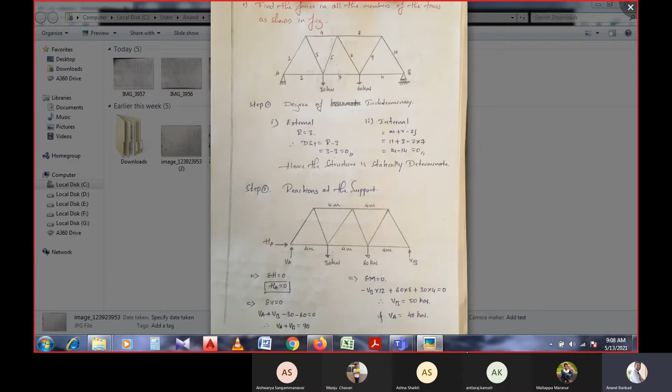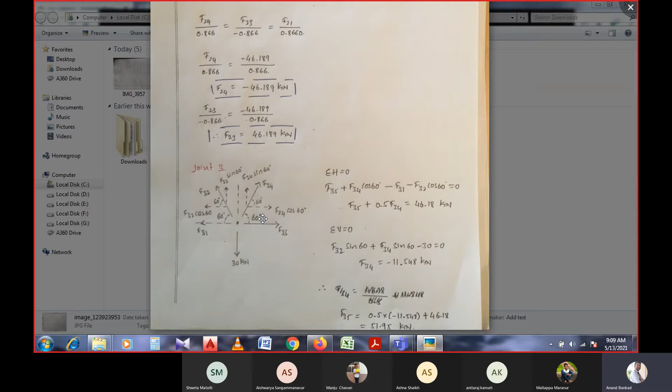We have discussed till joint number 3 in the previous class for the first problem, and let's move to joint number 4. In joint number 4, it is observed—I will show the question once again. See, this is the problem.

In this problem, joint numbers 1, 2 and 3 have been solved, and now joint number 4 is to be solved. For joint number 4, we have 4 members. In these 4 members, this beam is already defined in joint number 2, and this beam is already defined in joint number 3. So now we are left with this beam as well as this beam in joint number 4.

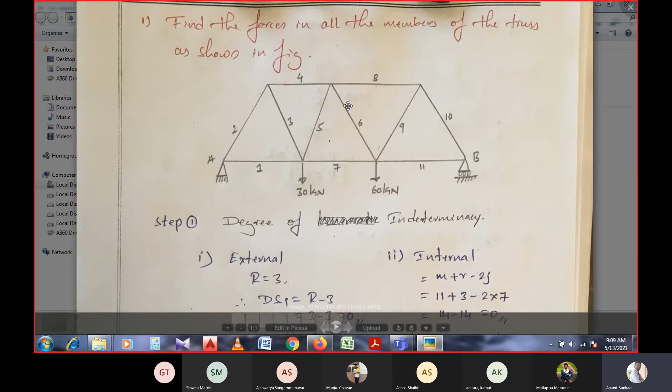So the forces in these two members have to be defined now. For that, the particular joint is drawn in this manner. Here, this member is joining to joint number 2, that is F42, and this beam is joining to joint number 6, that is F46.

Since it is the fourth joint, F42 refers to the fourth joint joining to joint number 2, and the fourth joint joining to joint number 6. So now it is going to joint number 3 and joint number 5. I hope whatever we discussed about joints is known to you from the previous class.

Since joint F42 was defined while calculating joint number 2, we got the value of minus 46.189 kilonewtons in this member. And F43 was already defined while calculating joint number 3, that is minus 11.54 kilonewtons. Now we need to define or calculate the force in members F46 and F45.

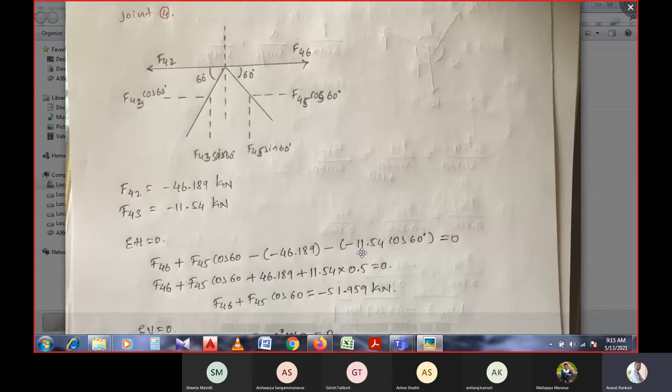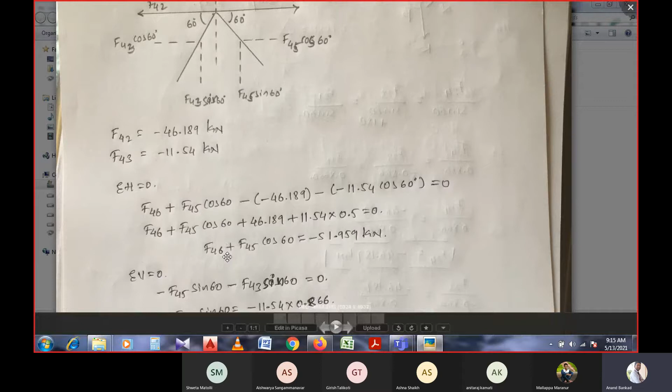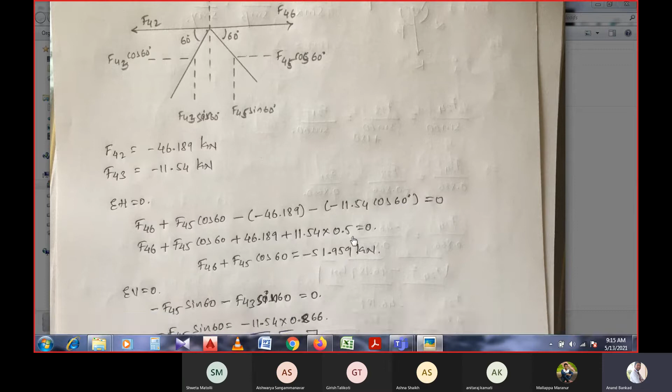Solving this equation, minus into minus gives plus 46.189, and cos 60 is 1 by 2, which is 0.5. So 11.54 into 0.5 equals that value. Solving this equation, you end up with two unknowns, F46 and F45, equating total forces to minus 51.959 kilonewtons. At the same time, the vertical forces also need to be considered.

We need to resolve that force as F45 sine 60 degree, or else we can consider cos 30, because it will have a 90 degree internal angle. Within that 90 degree, 60 degree is already here, so the remaining is 30 degree, which can be considered with cosine, or sine with 60 degree. I hope you remember this, simplifying or resolving the inclined forces to horizontal as well as vertical. The same thing is considered in this calculation.

F45 member has a vertical direction component F45 sin 60, and F43 member has a component F43 sin 60. Both of these forces are moving downward, which is considered negative, so minus F45 sin 60 and minus F43 sin 60.

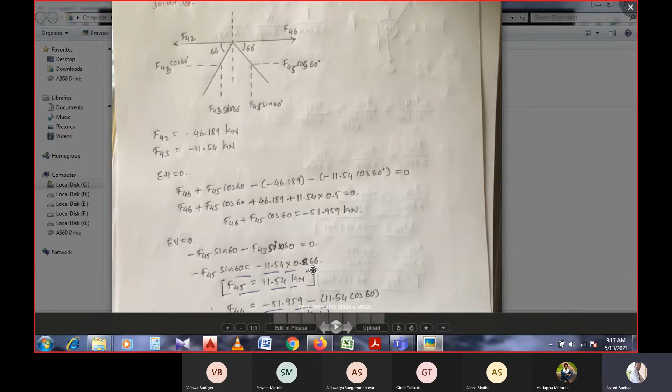F43 is already known, that is minus 11.54, but F45 needs to be defined. Substituting the known value of F43, minus 11.54, and sin 60 which is 0.866. Substituting in the equation and calculating the unknown, dividing by sin 60: minus 11.54 into 0.866. So F45 will be 11.54.

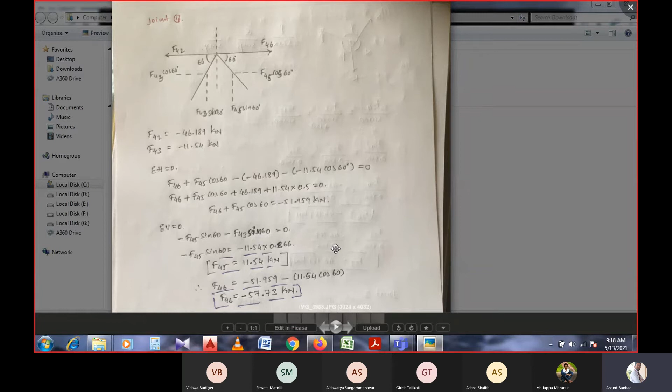Once we know the F45 value, we can substitute it in the equation and solve for F46, which comes out to minus 57.73 kilonewton. I hope it is clear how we resolved the forces and found the values of F45 and F46.

Is there any doubts? Take your time and ask. Is there any doubts? Ashna, are you understanding? Do you remember the problem? Anraj?

Sir, yes, whatever discussion we had, is that clear? Sir, see, if you have doubts, please ask me, don't sit quiet. I think the screen is visible for you. Yes sir. Can you guess how it is considered and how we have resolved these equations?

Mallappa? Sir, I was absent at the previous class. You were absent, so this is the main problem. Don't be absent for the classes because you won't understand the future classes, it will again be based on previous classes itself.

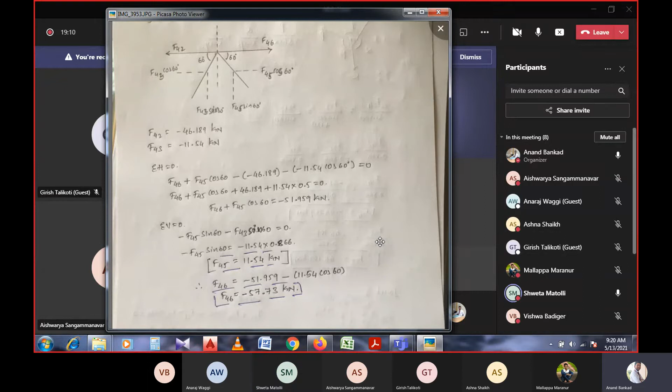And Shweta? Yes sir. Right, is that clear what we have discussed now? Yes sir, right? Yes, okay. Shall we move to next joint?

Yes sir. So this is the next joint. Again I will show the question over here. See here, joint number 1, joint number 2, joint number 3 and joint number 4. These joints are already defined. In joint number 4 we have defined this joint, this member as well as this member.

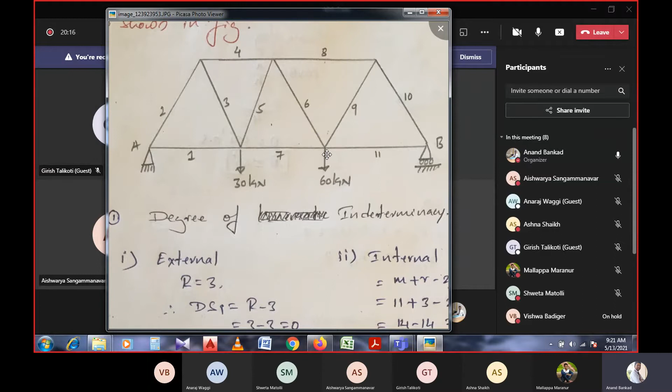Now we'll move to joint number 5. In this joint, the known members are this one as well as this one, because this member was already defined when considering joint number 3, and this one was defined when considering joint number 4. So only these two members are unknown, following the method of joints. In joint number 5, members 1, 2, 3, 4 are there along with a 60 kilonewton force acting downward.

So that is what we have considered over here. 60 degree is the internal angle, and two members are moving from joint number 5, and another two members are having horizontal directions with one vertical load which is acting downward.

This member is connected from 5 to 4, denoted F54. Since this joint, from joint number 5, is moving to joint number 6, it is F56. We already considered joint number 3, so F53, and from 5 it is joining to the 7th joint, that's F57. Along with that we have one vertical load.

In these members the known forces are F54 and F53, since F54 is nothing but F45. That means the same member is considered for different joints.

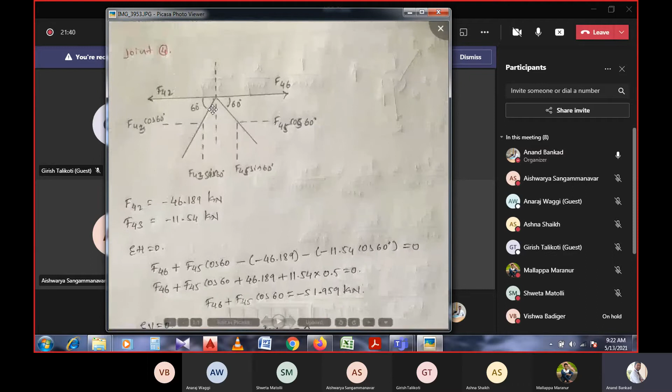For joint number 5, we have considered F54. The same member in joint number 4, we have considered F45. This member is considered as F45, and the same member is extended and connected to joint number 5, which is F54.

So this is how F45 is considered, and F45 is known, F54 is known, and F53 is known values. F54 having 11.54 kilonewton, that is tension, which is positive. F53, already calculated in joint number 3, that is 51.95.

These two forces are already defined, and defined forces need to be considered over here. So here again we need to solve for F56 and F57. These two members having compression and tension. Those forces need to be defined now.

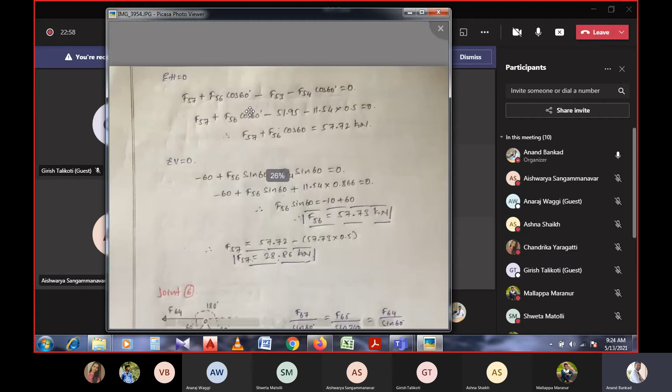How do you define? By just having consideration of summation of horizontal forces and summation of vertical forces taken into 0. Remember this diagram. Referring to that diagram, here we can have those horizontal forces as well as vertical forces.

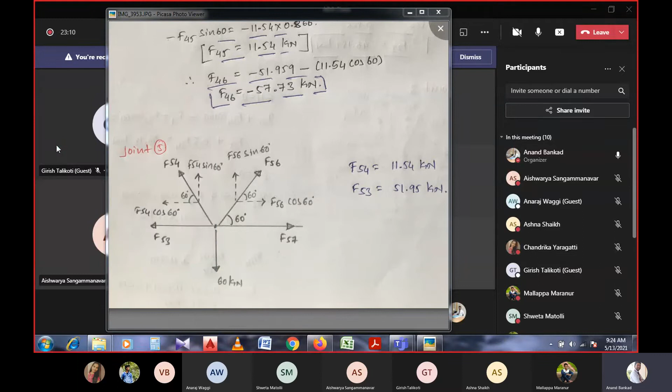So if you want, I could write over again here. So here horizontal forces equal to 0 if I consider. So what are the horizontal forces we can observe here?

F57, moving towards right, that is considered positive. F57 is considered, and here F56 is considered along with 60 degree, plus F56 cos 60 degree. So these two forces are moving to the right side and taken as positive sign.

Now we have F53, that is moving towards left, and that is negative sign. And again we have another force which is having the inclination of 60 degree, that is F54 cos 60 degree. Apart from these forces, we don't have any other horizontal forces.

F57, F53, these are the forces moving horizontally, and these two forces having the inclination of 60 degree, and that is considered, which is equal to 0. So now F57 and F56 are unknown, since this joint is having these two unknown members.

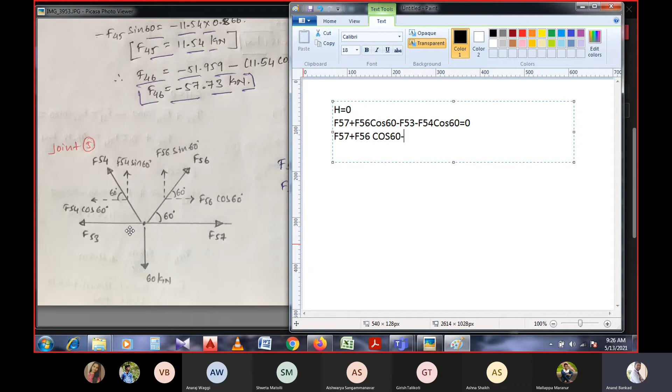So I will keep F57 and F56 as constant, but F53 is known. F53 is known here, that is F53 is 50... 51.95, the value of 51.95, which is having negative sign.

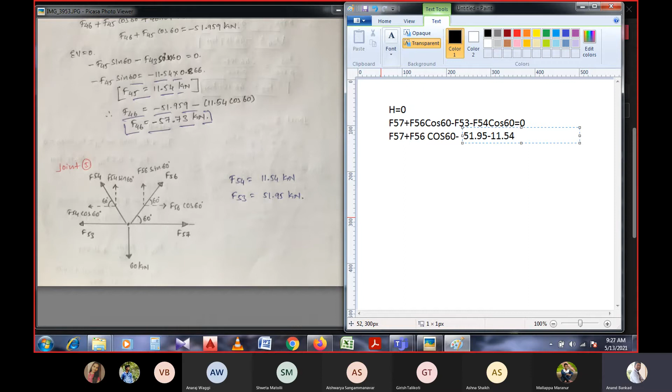So again F53 is known, and then minus F54. F54 is already having this equation of 11.54 along with cos 60. What is the value of cos 60? Cos 60 is 1 by 2, multiplying with 0.5.

So now if you solve this equation, F57 plus F56 cos 60, that will remain same, and 11.54 with negative sign. 11.54 multiplying with 0.5 and 51.95. So that both together will be 57.72, which is equal to 0.

That means we can have F57 plus F56 cos 60 which is equal to 57.72. That means we are taking this number to the right side, which is having negative sign at the left, and we will be having positive sign at the right when you take it to this one.

So here I will consider this F57 and F56 cos 60, 57.72. The same thing what we have written over here. F57, F56 cos 60, and that is 57.72 kilonewton. So this is the horizontal forces what we have resolved.

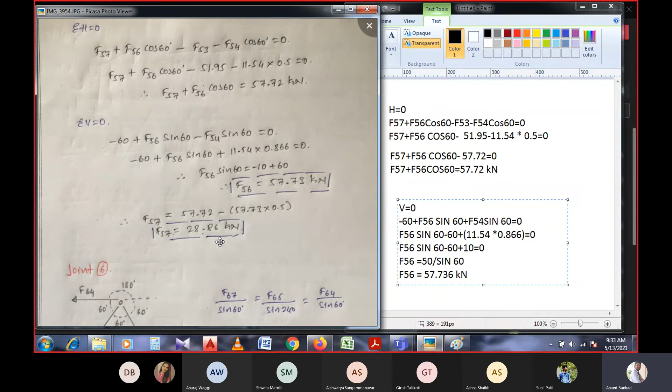So is that clear, dear friends? Please observe these two drawings and the simplification we had and how we calculated. If you have doubts in this, please let me know. That means these forces are resolved and values are found out. It is again a simple calculation.

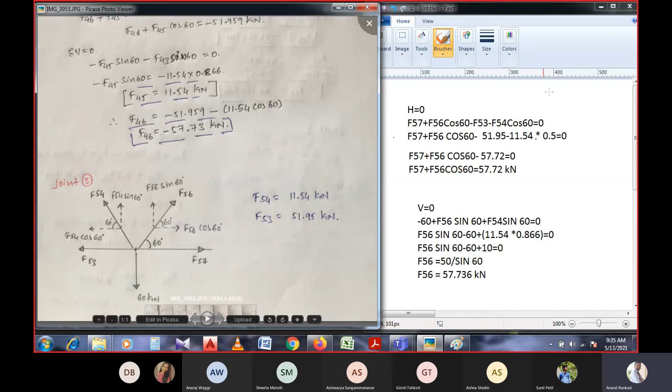Right? Anraj? Anraj? Yes, sir. Right. Is that clear, what we have discussed here now? Yes, sir. Don't say yes until understanding. Remaining. See, every time I don't need to ask whether you understood or not. Please, if you don't know, then let me know so we could have a discussion again. If you sit quiet, you will be getting lost. Please let me know whether you understood or not. If you understood, say yes, we have understood, and we can go for the next joint. Feel free to discuss, don't sit quiet. Yes? Understood, sir. Okay, fine. And remaining.

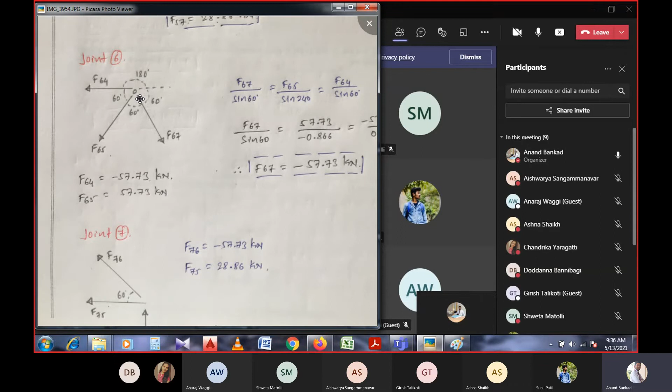Okay, anyhow, we'll move to the next joint. So apart from these, we have joint number 6. So joint number 6 and joint number 7 we are left with. So here at joint number 6 we again have one force to be defined. So here in this joint, again what we considered for joint number 2, the same thing needs to be considered here.

That means Lami's theorem. Lami's theorem states that the force, whatever force we consider, is in proportion to the sine of the angle between the other two forces. That means if you consider F67, the other two forces are there, and the angle between those two forces needs to be considered as sine, right? So the same thing, if you consider for joint number 6, there are three forces having an internal angle of 60 degrees. If it is 60 degrees, then these two of 60 degree, that means it will be 120, and again the remaining angle must be 60 because the horizontal line will have a total internal angle of 180, right?

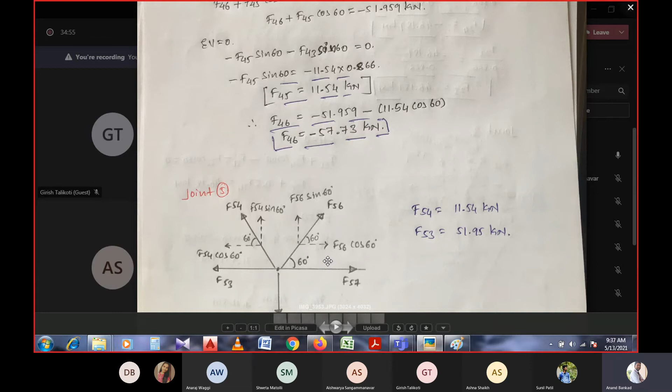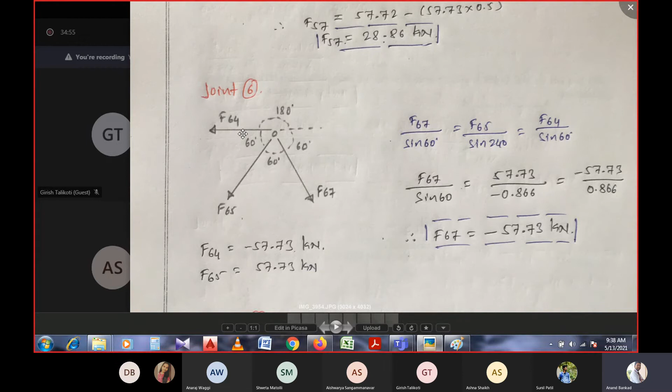Based on that it will be 60 and remaining it is 180 again. Forces F64 and F56 are already defined - F56 is nothing but F65. F46 was already defined in the previous step. The same F64 value is used because the member is same, but joints are different: this value is from joint 4, and the same member at a different joint is denoted F64. With this, F64 has internal angle, other two forces having internal angle 60, and for F56 these two forces have internal angle 180 plus 60, that is 240, and for F64 we have these forces opposite having internal angle of 60.

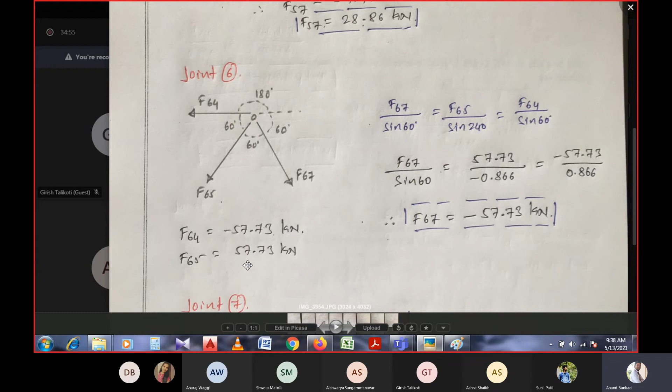By substituting the known values, F67 is the only unknown value here, and F65 is known - that is F56 what we defined previously - and F64 is minus 57.73, that is 0.866. So F67 is found out by referring to either this equation or this equation - the same equation will be there, both are same and having negative signs in both equations. So F67 will be minus 57.73. Only F67 is unknown because F64 is already defined in joint 4 and F65 is already defined in joint 5.

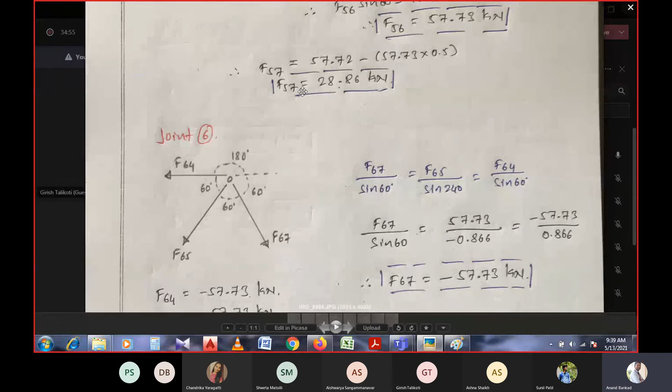Apart from these, we are left with joint 7. In joint 7, F67 is already defined - F67 or F76 both are same, we already defined that - and from joint 5 to 7, F57 is already defined as 28.86. Since at joint 7 both forces, both members, are defined with the forces in joint 6 as well as joint 5, hence all forces are found out and defined by referring to joint 7. This completes the problem of analysis of truss by method of joint.

Once you complete this analysis for the different members, we need to tabulate the forces by considering each joint or each member - you could say for each member what is the exact force. Here the compression force refers to a negative sign and the positive sign refers to tension forces. This is how the particular analysis needs to be done.

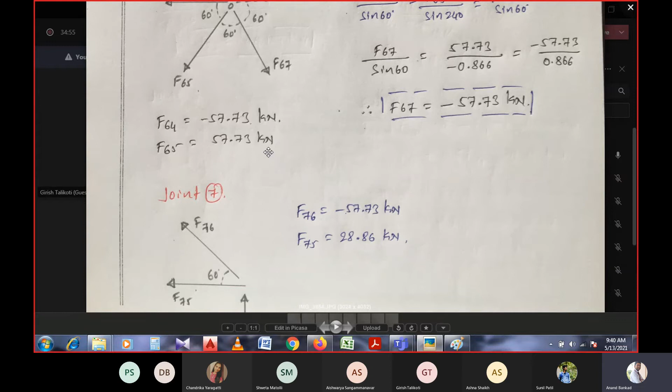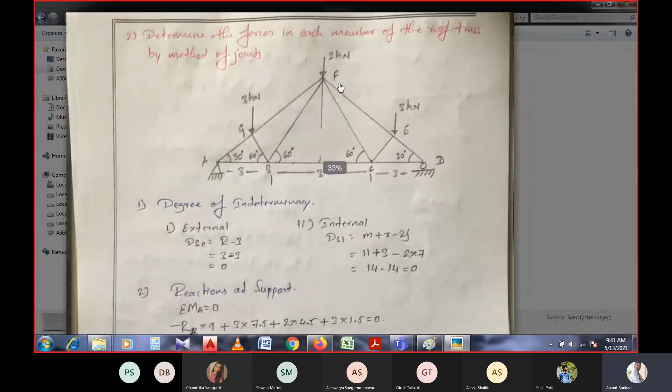Let us consider some more problems on this content so that you could understand it better. With this, I will conclude this problem. Now we can start another problem over here. I will take a new problem with the problem notation. See, this is the problem.

Is this screen clearly visible for you people? Yes, sir.

Right, so now the members need to be defined, the forces, by referring to method of joint. The internal angles for the members are given like this, with dimensions for the beams having 3 meter and 3 meter at the base, and having 3 kilonewton and 2 kilonewton for the joints.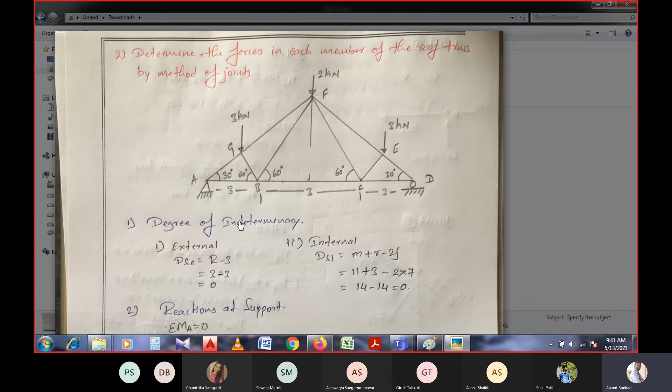At the initial stage, we need to consider the degree of indeterminacy for both external as well as internal. This support is having two reactions, one vertical as well as one horizontal, and moment is not allowed in this reaction, since we'll be having only two reactions, vertical as well as horizontal. Next, if you move to the other support, it will be having only vertical reaction, we don't have any horizontal as well as moment. So at this support we have two reactions, and at this support we have one reaction, both together will be 3. So r minus 3, 3 minus 3 will be equal to 0, meaning this given truss is determinate externally.

So if you find out the internal determinacy, m plus r minus 2j is the equation we can refer to.

So members are there, how many members are there, and how many reactions are there at the support, and for each joint we will be having two forces, that is multiplying with 2. So there are 11 members. If you calculate, 1, 2, 3, 4, 5, 6, 7, 8, 9, 10 and 11 members plus 3 reactions, and 7 joints are there: 1, 2, 3, 4, 5, 6, and 7. This is not a member, this is a horizontal line that is referred to the center.

So here it will be 14 minus 14 equal to 0. That means the given truss is determinate internally. That means the particular truss is determinate both externally as well as internally. That you must define before starting the analysis.

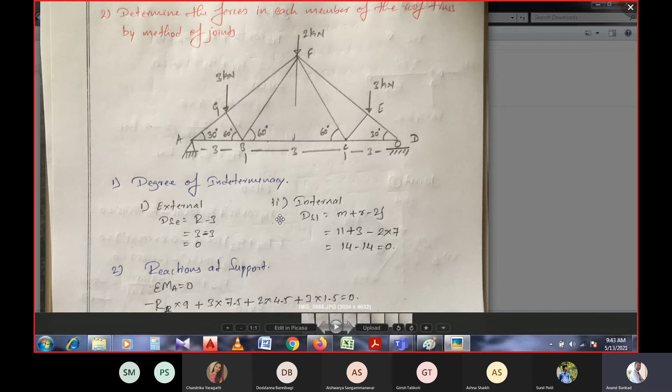So after this we need to calculate the reactions. How do you calculate the reactions? The reactions at the support are like this: at support A and support D, or support B. As we'll be having the beam vertical forces with the distances, the same thing would be considered. So if you take the moment at point A equal to 0, then this point will be having moments against this point.

So here if you consider A point as a hinge, RB into the perpendicular distance, the force and the reactions will be here. So with this reaction we can have the perpendicular direction of 9, 3 plus 3 plus 3. So RB into 9, since it is negative because it will be having anti-clockwise moment.

So after this we have 3, which is acting at the center. 3 by 2 will be 1.5, 3 plus 3 plus 1.5 will be 7.5, and then we have another force that is 2 kilonewton at the center. 3 by 2 will be 1.5, 3 plus 1.5 will be 4.5, 2 into 4.5 for the distance from the force to the perpendicular distance, 4.5 at joint A, or at the point where we have considered moment equal to 0.

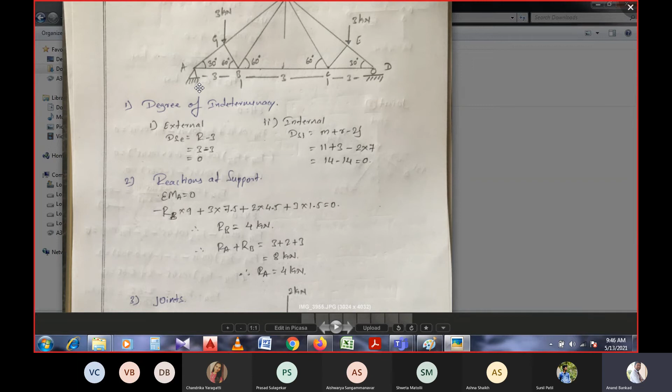And now we have this 3 kilonewton force which is acting 1.5 meter from the perpendicular distance, that will be 3 into 1.5. If you resolve these equations, you will get 4 kilonewton as a reaction force. Since there are 3 plus 3 plus 2, a total of 8 kilonewton of total force acting downward, out of that 8 kilonewton, support B is having 4 kilonewton of reaction. Again, support A will be having the remaining force. Total 8 kilonewton, support B is having 4, means support A will be having 4, that is 8 minus 4. This is a very basic thing, to calculate the support reactions.

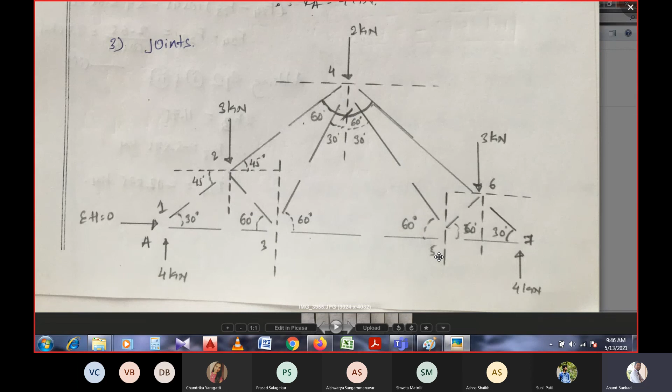So once the support reactions are confirmed, we need to move on to the joints. So here in this problem I tried to define and show how the members look when we consider a joint. So here I have defined the same question, taken into notations in this manner. So joint number 1, 2, 3, 4, 5, 6, and 7. At the same time, if you see in this truss, it will be having a symmetry, the same angles, same loads on either side, left and right.

So here horizontal force will be 0 because we don't have any horizontal load acting on the truss. And vertical force is having 4 kilonewton at the support and 4 kilonewton at the other support. And if you consider joint number 1, horizontal force, vertical force, along with these two forces we have two members which are acting with a 30-degree internal angle.

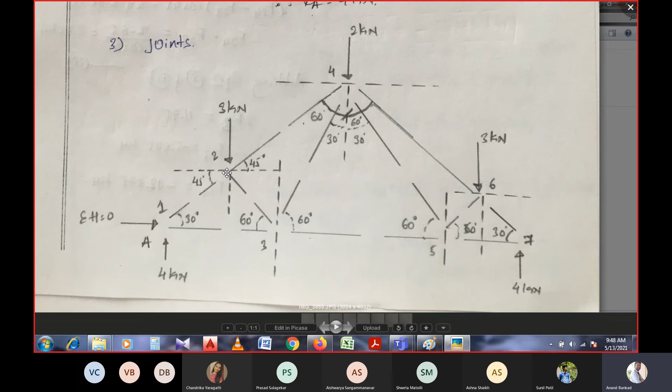So here if you denote this member as F12, because we are considering the joint 1 to joint 2, that is F12, and joint 1 to joint 3, that is F13. So these F12 and F13 can be considered for this joint. And if you refer this joint, F21, F23 and F24 - when you come to this joint, it will be known from joint number 1 itself, and these two joints will be unknown. I hope that whatever I have drawn here is clear.

That means the angles are denoted, since this triangle will be having 180 degrees. In this 180 degrees, 60 degree is this angle and 30 degree is this angle. That means it will be having a 90 degree internally, and if the horizontal axis is taken, it will divide with 45 degrees of angle each.

So here the same could be considered. If it is 45, it is also 45, because this total has a 90 degree internal angle. Again this is internal angle. If you consider 90 degree, here it is 45 and remaining will be 45.

And for joint number 2, it is acting 3 kilonewton of total force. And the same thing if you consider at joint number 3, it is 60 degrees having the internal angle. Two members are moving from 3 to 2 and 3 to 4. So these joints are considered by referring to the internal angle.

So if you come to this joint, member F31 and F32 will be known. F31 will be known from joint number 1 as F13, and F32 will be known from joint number 2 as F23. So now remaining will be F34 and F35. These two members will be remaining, and same thing we need to consider the horizontal forces and vertical forces.

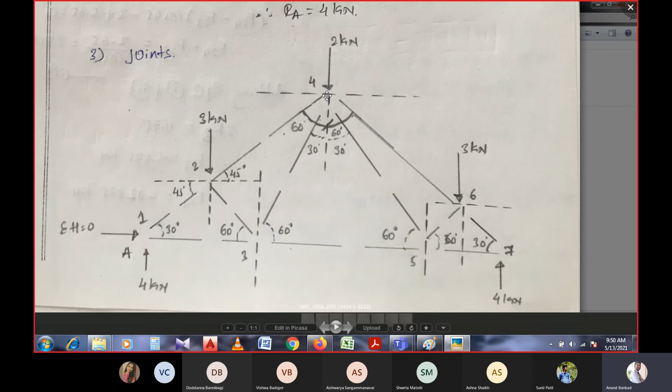If the members are having an internal angle, that has to be resolved in the vertical as well as horizontal direction. If you resolve those forces, the unknown value will be known, and substituting in another equation will give both member values. Same thing if you move on to this joint, this problem will be continued in this manner.

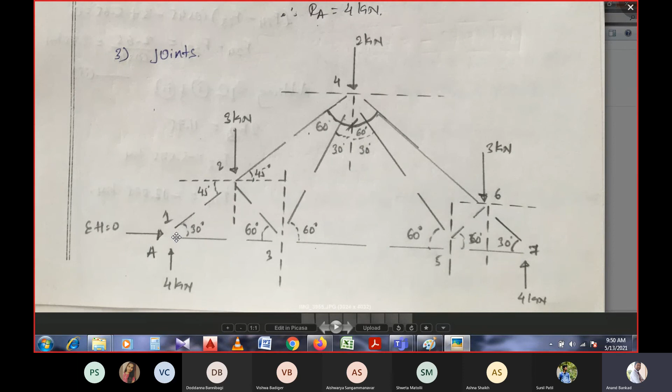So we'll start this problem in the next class as joint number 1 and joint number 2. So if possible, take this screenshot and try to solve the joint forces, that is the member forces in joint number 1, 2, 3. I hope you people will try this, and everything is written in the drawing here.

You can start easily by referring to the drawing for each joint. So we will give you 2-3 seconds to take this screenshot and try on your own.

I think you people can do this, because only simple calculation will be there. You just need to resolve the forces into horizontal as well as vertical, and the sign convention will be: for the right side it is positive, for the left side it is negative, and for the top side it is positive, and for the bottom side, that means from the horizontal axis if you consider towards down, that will be negative.

I hope it is clear for you people. Shall I look forward for the solution for joint number 1, 2, 3 before coming to next class, dear friends? Shall I look forward for joint number 1, 2, 3 before the coming class?

Andraj, Yes sir. Shweta, can you able to solve this? Yes sir. Okay, whether it is right or wrong, please try it. At least you could know where you are going wrong, right? If you are solving it, it's fine, better.